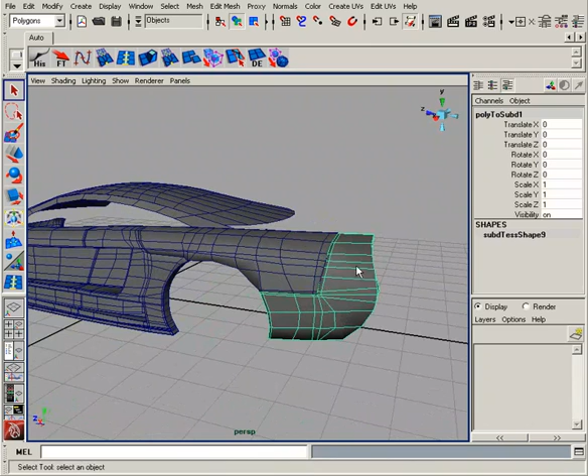Now we'll use a little different method to mirror the back end like we did the front. Okay, so we've got one piece created for this front part. We need to do the same thing for this back section right here. And it's nice because we have this cut into panels here, so we only have to worry about this part, not necessarily the whole thing. So let's take a look at this. And we're going to do this piece a little bit different than we did the front part.

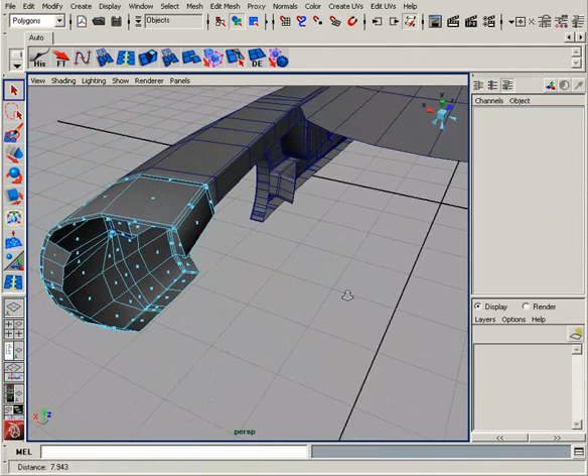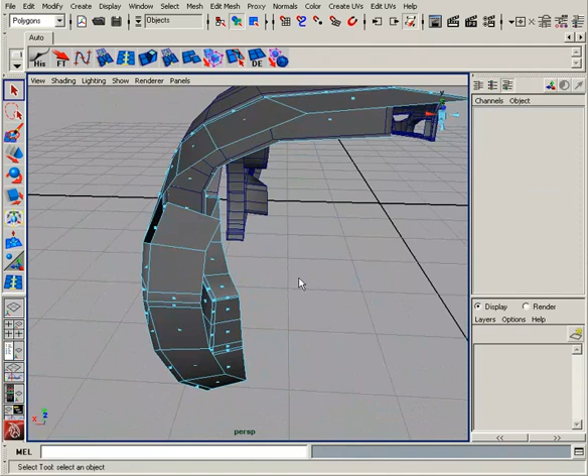And let's go ahead and I'm just going to get rid of some of these faces here we don't necessarily need. I'm going to get rid of these, all these guys. Right here, anything that's facing the back, basically, I'm just going to get rid of those. All the way down to this corner right here. Okay.

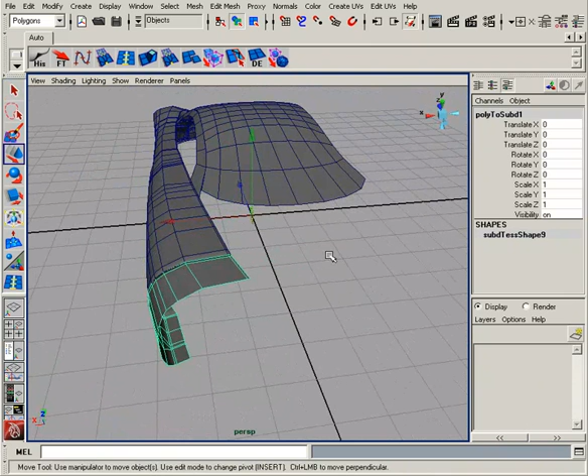All right, so we need to get this piece over to the other side, basically. So one way that we can do that without mirroring, we can actually scale it in a negative X, which you may have done before. Just a couple things to be aware of when you do that, so let's take a look at those. First, I'm going to take off two-sided lighting. Under lighting here, I'm going to take that off.

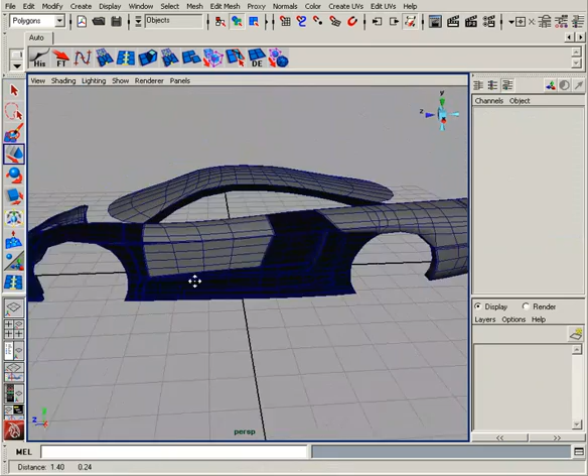And you can see we have some pieces that are black and some pieces that are gray. Well, the black pieces basically have their normals reversed, so they think that the inside is actually the side you want to see. So they're a little bit backwards. So what you can do to fix that is to select your piece, go up to Normals, and just say you want to reverse those normals. Okay, and that's going to fix that.

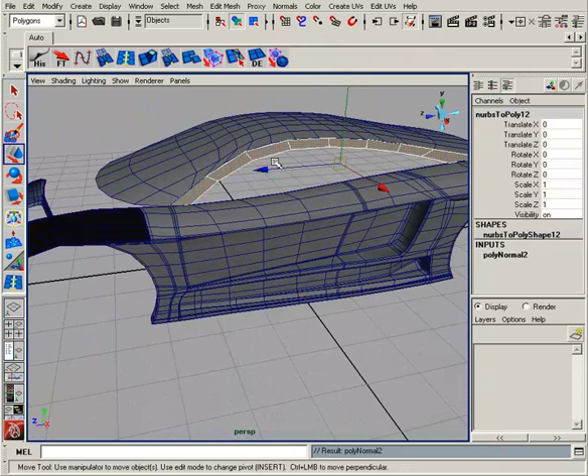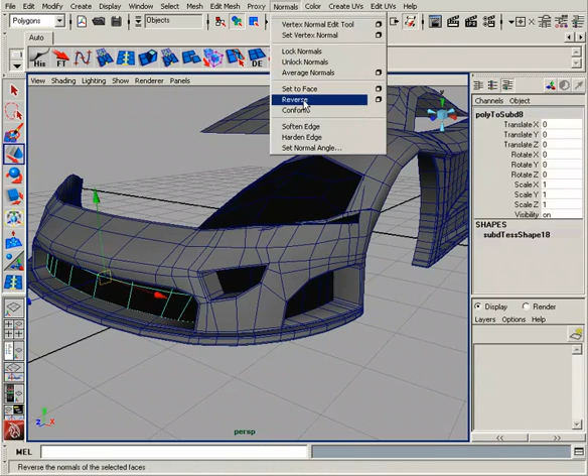Do it to that piece, and it's good to sometimes work with two-sided lighting off so that those pieces that may be created with reverse normals become apparent to you. Now you'll want to make sure it's in a polygon before; you won't be able to reverse normals on a sub-D surface. So you want to make sure that you're working on a polygon there, and I'm just going to reverse those normals. Those should be reversed.

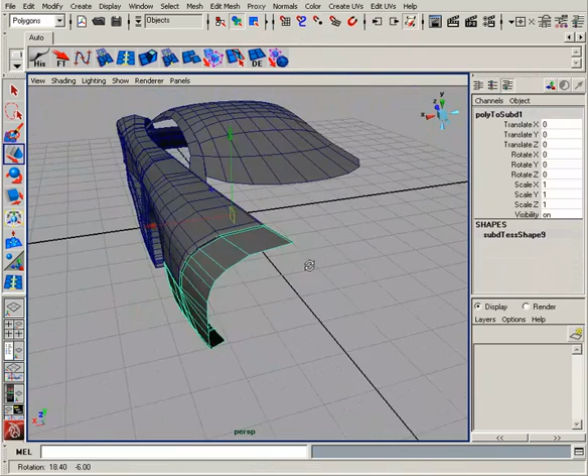And let's take a look. Okay, so this looks all right. Now let's take a look at what happens here now that I have that two-sided lighting off. Okay, the center point of my piece back here is at the origin, which is what we want. If it wasn't centered, all you'd have to do would be Control G to group it to itself, and it would create a new group with the center point at the origin.

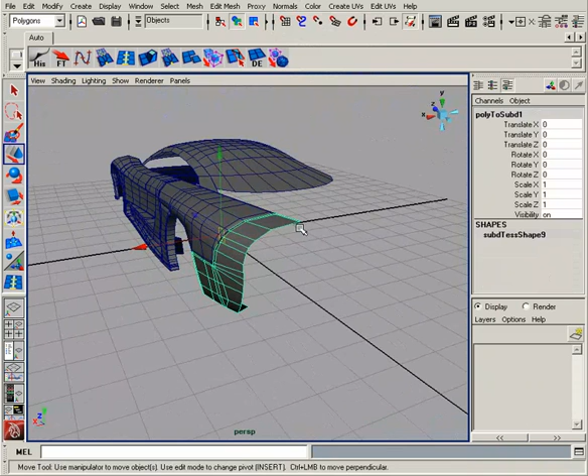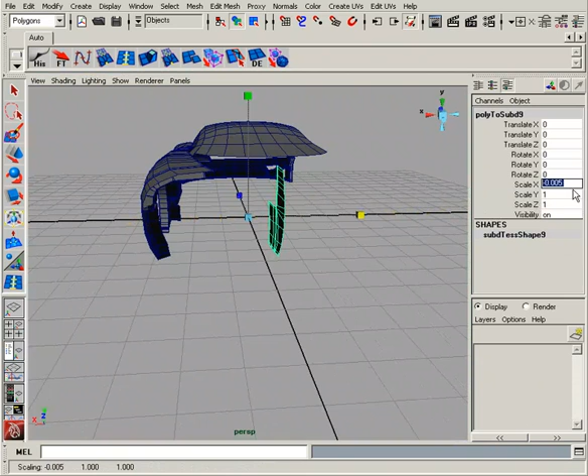So I'm going to take this and duplicate it, Control D, and I want to flip it across X. So if we take a look at scaling X, if I scale that down, you can see it gets closer and closer to the origin until you get to 0, when it's completely flat against the X axis there. Okay. So if I keep scaling it into the negative, let's go to -1. At -1 it'll be the same size. It will just be across the X axis, and it will be essentially mirrored.

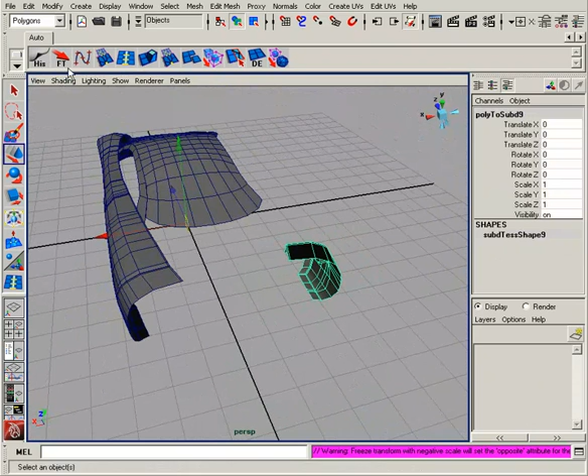Now the problem comes, you have this negative value in your channel box here. You want to freeze that out. Okay. When you freeze those transforms and you look down here, it says freeze transform with negative scale will set the opposite attribute. Okay. So you can see that now this has reversed our normals essentially.

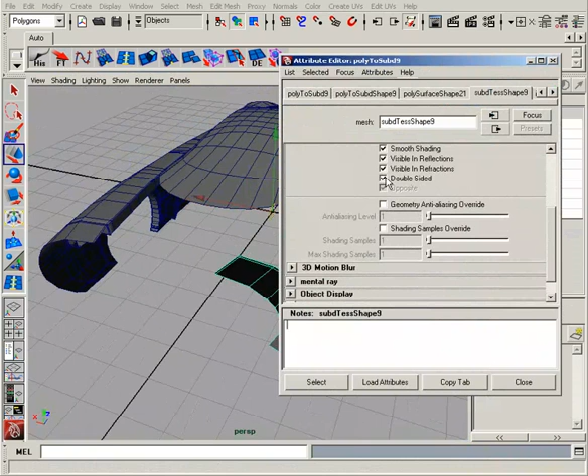If I go into my Attribute Editor and I go into Render Stats here, you can see that this Opposite value has been turned on because, freezing those negative transforms, Maya's trying to compensate for what's going on. So I'm going to turn off Double Sided, and I'm going to fix that by turning off the Opposite attribute, and turn back on Double Sided. You can see that now all I have to do is reverse my normals.

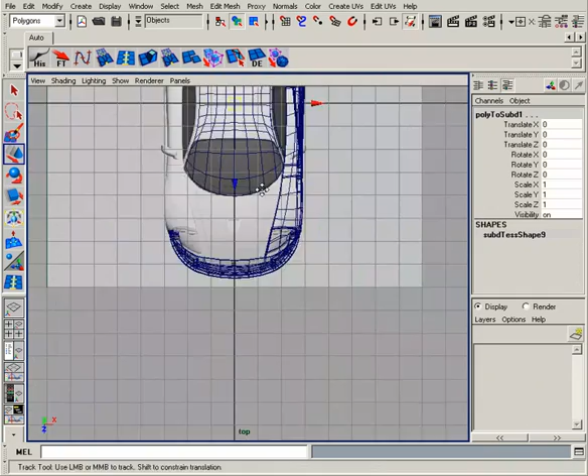And now we've got this piece of geometry here. Okay. So now we've got these two pieces. Let's go into our top view and check those out. We've got these two pieces here. So basically we want to have these connect, but we don't want them to connect all the way across here. We want to connect behind the trunk.

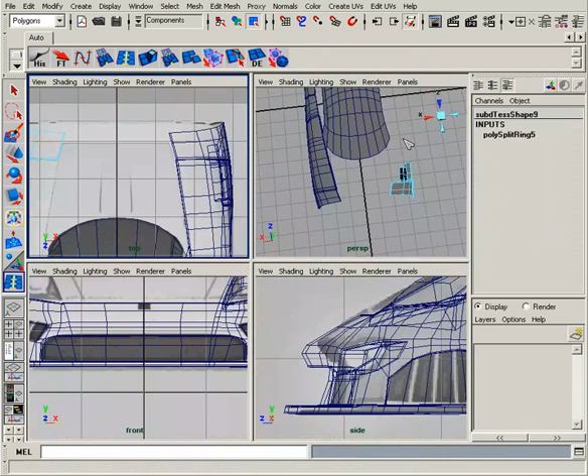So we need to actually add a line right there and a line right there. And then we're going to use something called bridge. Okay, I'm going to go ahead and go into my front view just to check that out. So there's our two pieces. So we basically want to connect these across the way.

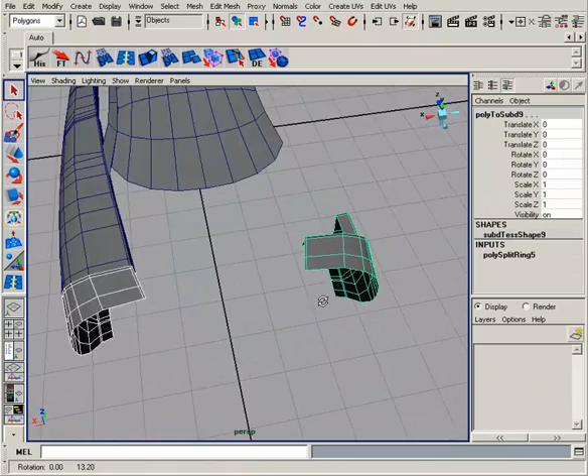Okay, so there's a neat tool that we can use called the bridge tool, and that's going to connect any border edges that you want together. Okay, so all you have to do is select your two pieces, and they have to be one piece, so I'm going to just combine those. Delete that history. Now you can see they're one piece.

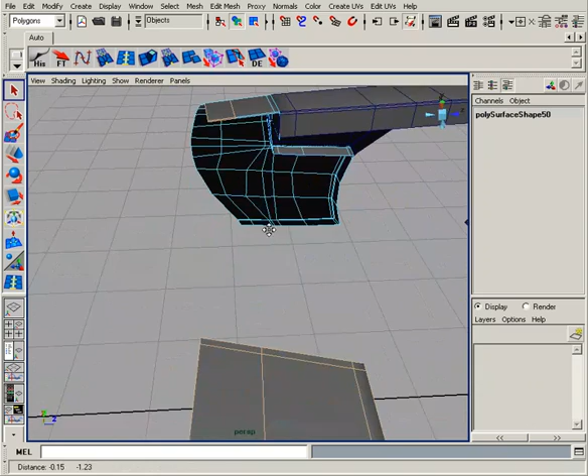And now all I have to do is select border edges, and in this case I only want those that are behind where we have the trunk. You see right here. And I don't want any on the side. I basically just want this edge and this edge. Okay? And so we've got those two edges selected. Now we can go Edit Mesh and we want to do a bridge.

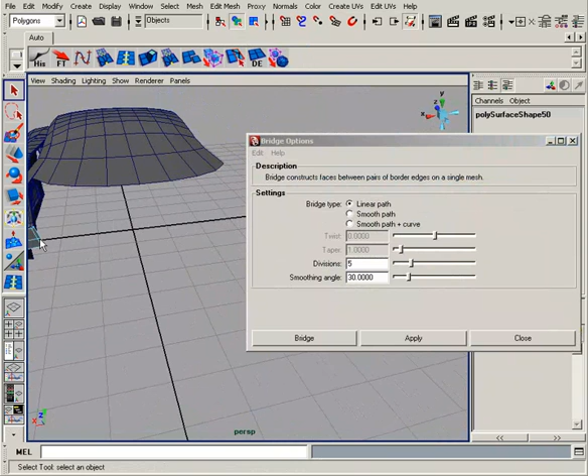There's a few ways you can do it. A linear path will give you a completely straight piece of geometry across here. A smooth path will kind of blend between. And a smooth path plus a curve will give you a curve that you can manipulate. So if you want to make a curved bridge between something and you want to be able to change that curve, you can choose path and curve.

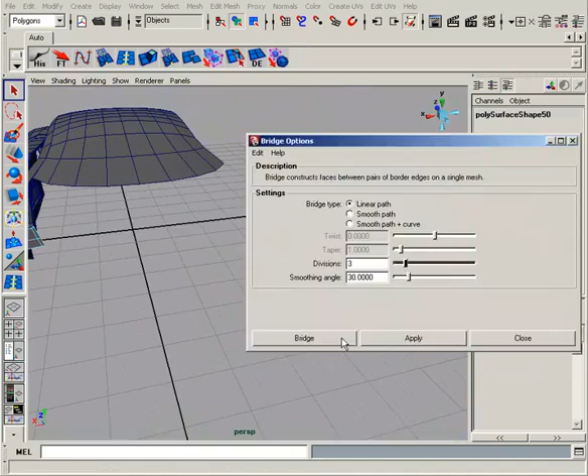Now if you want to have a curve, you want to make sure that you do this from the beginning because you can't go back and add a curve later. Okay. In this case, I just want a linear path, so I'm going to choose that. I'm going to bump these divisions down to 3, and we'll check that out. You can see it's created geometry right between there, just a straight line, which is what we want.

So essentially, instead of extruding that piece over to the origin and then mirroring, it's just a little different way to get to the same place. Okay, so we could have taken this edge, extruded it over, popped it to the origin, mirrored it over, and got kind of the same result. So just be aware there are a few different ways of doing things.

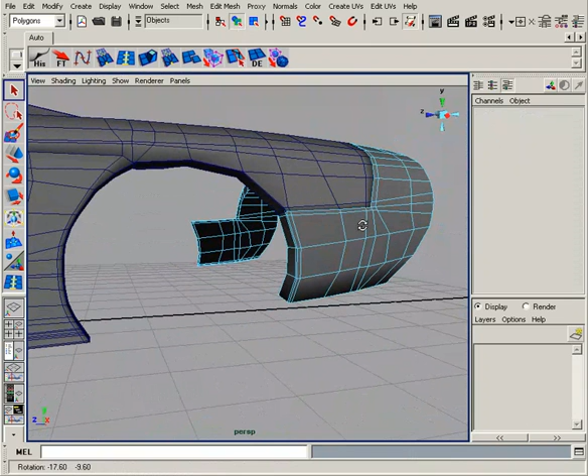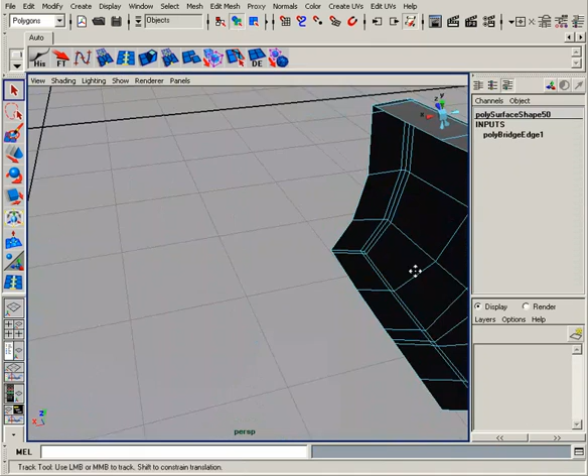Alright, so now let's go ahead and bridge the rest of this. I'm trying to decide how much of this to bridge because we have this wheel here. Let's just bridge the bottom part for now. And so I'm just going to select these bottom edges and these bottom edges right here all the way across. Make sure you don't miss any.

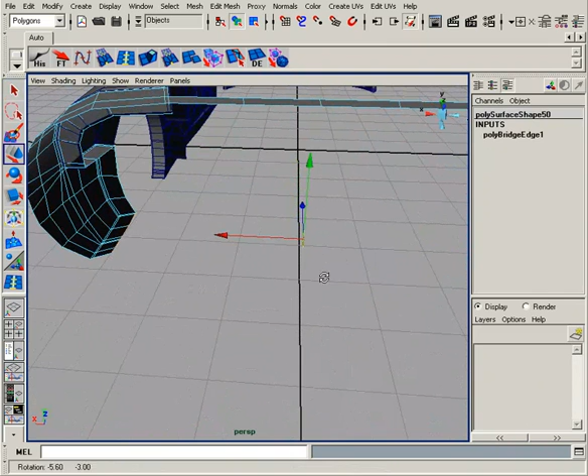You can get extra edges as long as they're not border edges. Okay, you can just select any of these and it won't matter. It'll figure out which ones are border edges. But if you have extra border edges selected, it will try to bridge between those as well. Okay, so I'm just going to do another bridge. Alright, so that just creates a nice square piece all the way across there.

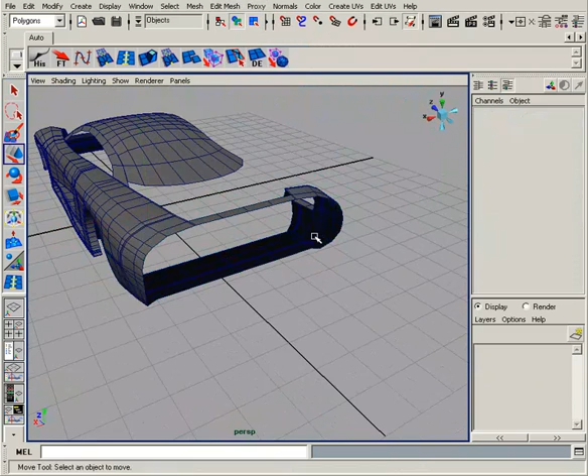So that's working pretty well for us. So now we're starting to get this back end filled in. I'm going to go ahead and delete my history. Alright, so in the next lesson we're going to go in, start filling in this back end with geometry, start drawing it out, and start extruding in some of those pieces that we see in the back end here.